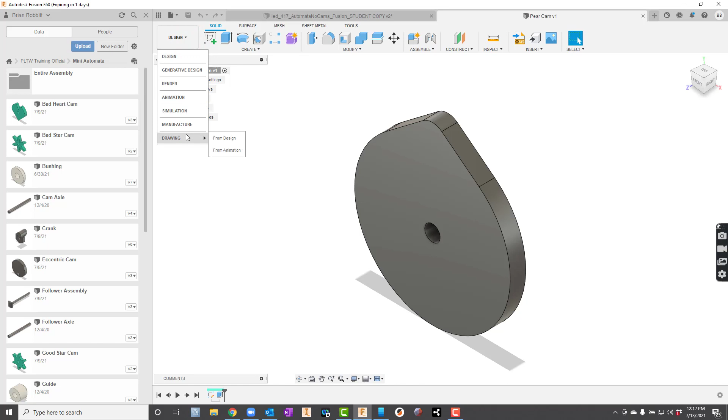And what I'm going to do is, there's my design. So I'll say drawing, and from design. I can just fill it out for now, keeping everything basic. I'll say create new and from scratch. And if I had a template like I should, I could use it here, click in there, and there's my template. For now, I'm going to just use sheet size A.

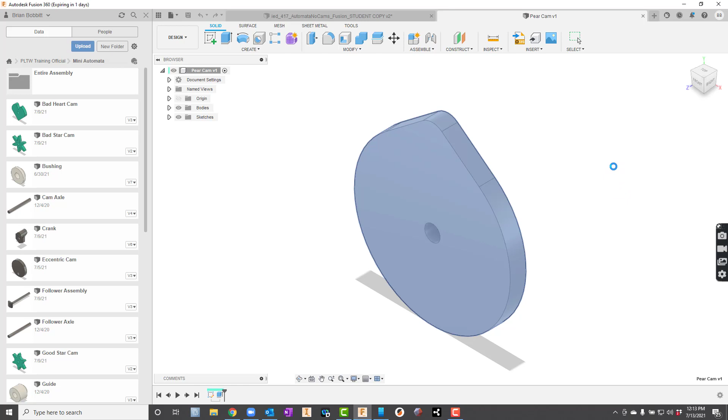Let's go ahead and pull that up. Because that's the part that I came from, it's going to pull the Pear Cam up, and it should start me off with the front view of it. So there's that. I'll go ahead and click OK, because there's my front view.

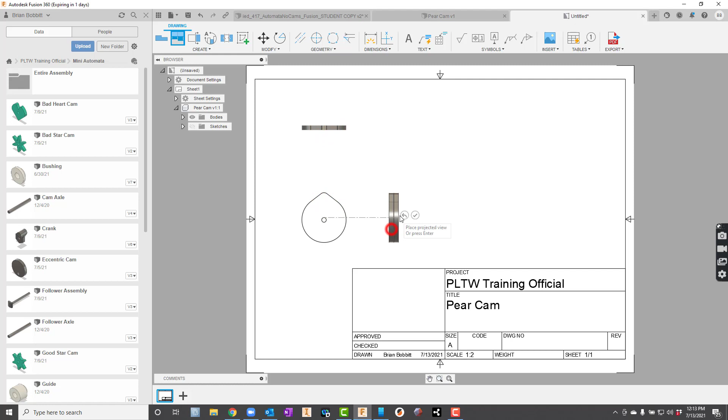I'm going to go up here to projected now, and click there for my parent view. Put my top view in, a right side view, and an isometric view. Then I can just hit the check mark here, or right click and say OK. I do want to go ahead and double click the ISO and make it shaded.

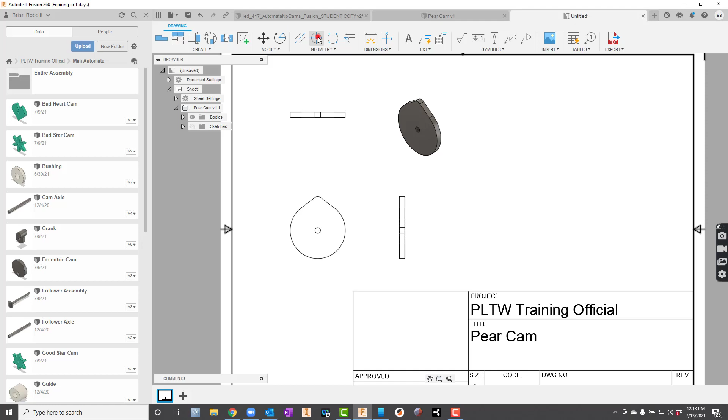I'll hit close. My very next step is to go ahead and put center marks in. So on this one, there's a hole there. There's actually a center mark here as well, and there would be one on this circle, but they just kind of coincide over there, so I'll undo the last one. I'll get to why we put those center marks in just a second.

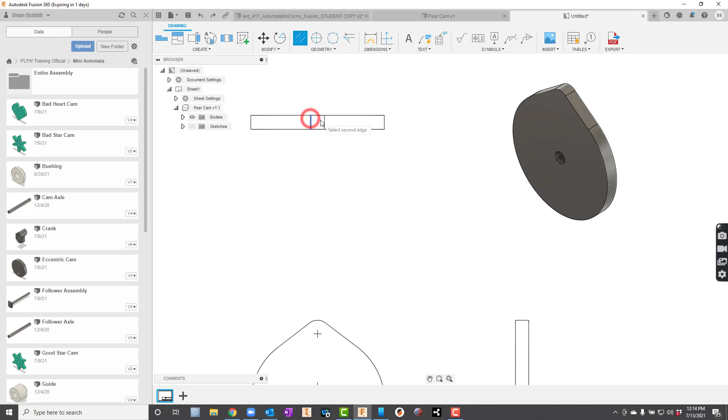I'm also going to put center lines in. So here I click there - there's a center line that goes through there, marking where the hole would be, right? Same thing here. All right, so now I've got the basics down. I've put my views in, shaded the ISO, and put in center marks and center lines.

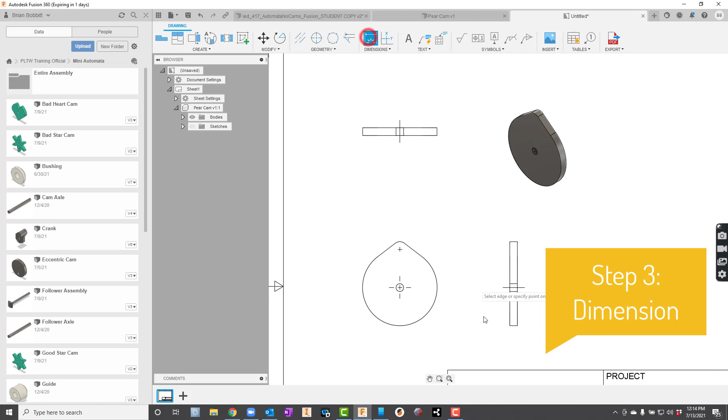So let's do some dimensioning. I'm going to go up here to dimension. I would click on the radius here and just kind of drag it out. Now what I'm seeing though is that we're putting numbers inside the part.

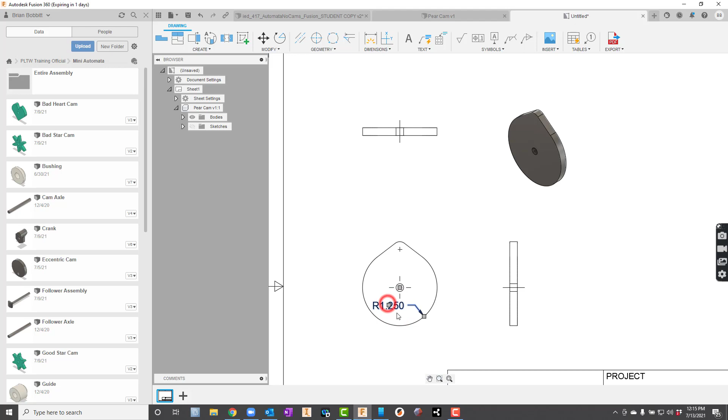That's a big no-no, okay? The reason is because when we hand that over to our machinist or whoever's going to build this, they could get confused by numbers being inside. So all we got to do is escape out of dimension mode by hitting the escape key, and I'll just click and drag it by these boxes and kind of pull it out. We always want to try to keep the dimensions between the views.

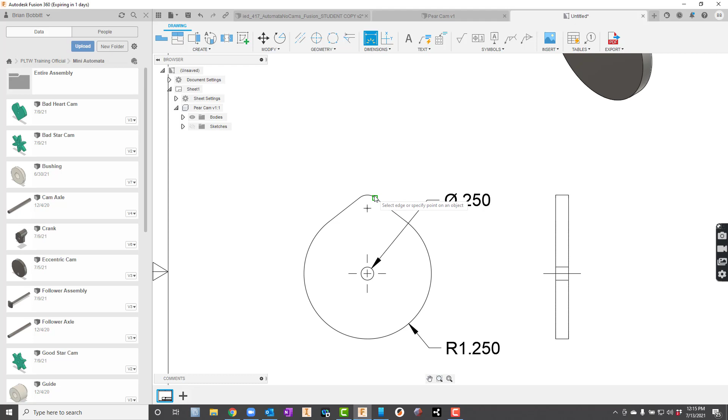All right, so let's do a little more. I know that the hole here needs a dimension as well - remember to drag that thing out of there. And we also know that there's an arc up here. Now when I'm zoomed way out, sometimes it's really hard to zoom in on just the radius, and sometimes it's really easy.

So sometimes I'll zoom in and get a really good go of it. Now notice that these lines are mostly parallel - I'm trying to be as organized as possible here, right? So I've got the radius there, I've got a radius here, and I've got the hole diameter.

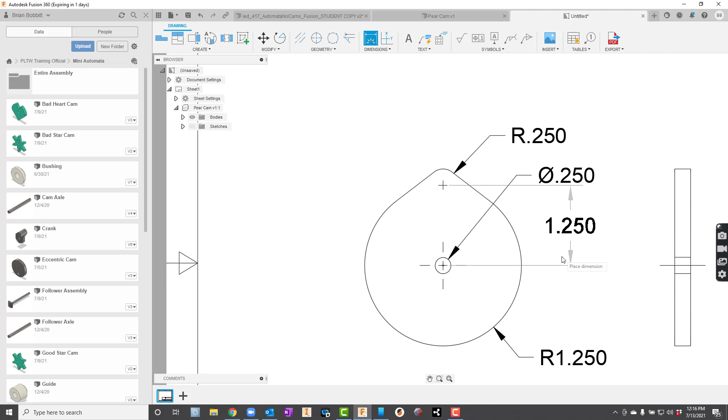Let's see, I should probably get a dimension from center mark to center mark, and I will drag this one out. I ultimately would want it over here though, but when I do that, see how those lines are crossing? The dimension lines are kind of crossed up. So I'll move it over here for this case.

All right, so I know that from here to here is 1.25. I know the radius up here, and I know the diameter here of this hole, and I know the radius of the bottom part of this arc.

Now if I wanted to, I could come over here and dimension again and say from this corner to the center mark, and I would want to go out here to the end of it. And then if I move my mouse into the right spot, I could do that.

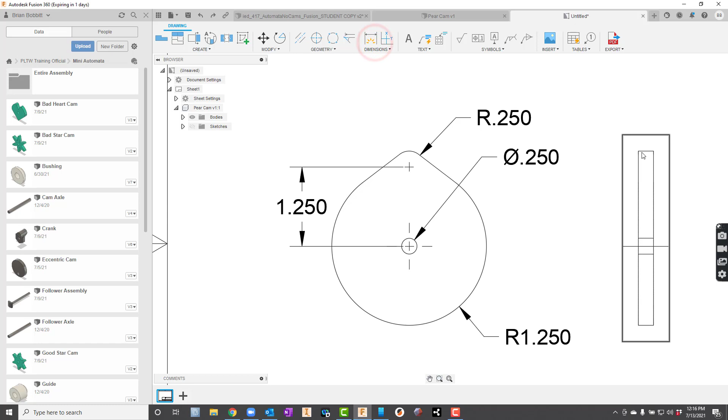I want to show you a common thing I'm seeing though. I'll see some people click on this line and then click on the center line and drag it out - sometimes that plays nice, other times you really have to click the end of it. Now you notice I got some overlap there, right? So I'm going to just click on that dot and scoot it out some, make it look a little prettier.

Now the thing is, I really don't know that I need this one, because of all the other dimensions - I have the radial there and the radius here in that dimension. So I really don't need this one, so I'll delete that one.

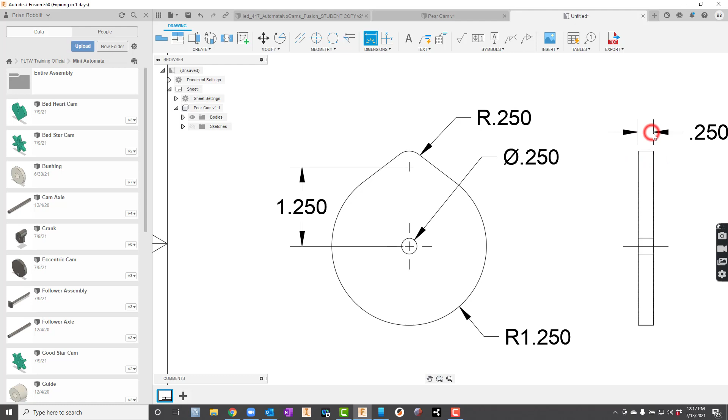One thing I'm going to need though is the thickness here, right? So I'm going to say from here to here and put it at 0.25. Now just kind of keeping with some standards here, I really need this 0.25, and I'm trying to keep them between views whenever possible, right?

So now if I do that though, look how cluttered it gets. So I'm going to click on this view and just kind of scoot it out some. Now it's a little cleaner looking, right?

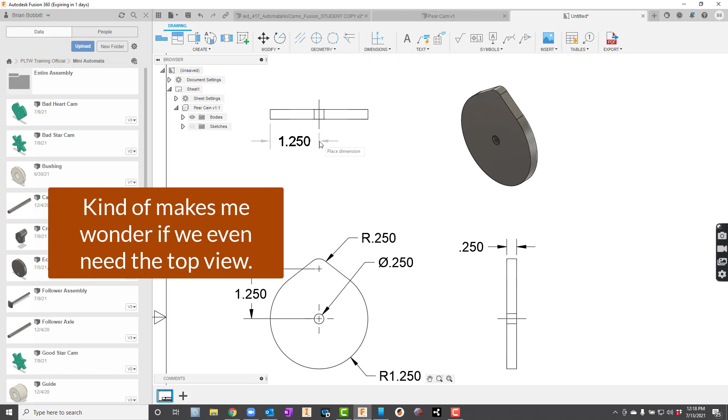If we look at this top view, there's not really a whole lot that I could put there that I don't already have. So if I click dimension again and say from here to here - see, that's not really helping me any because I've already got it. And I could say from here to here, but again that's not really helping me because I have that radial dimension down here, the 1.25. So really in this top view, I don't need any of these, right?

So let me zoom out and show you what we kind of look like here.